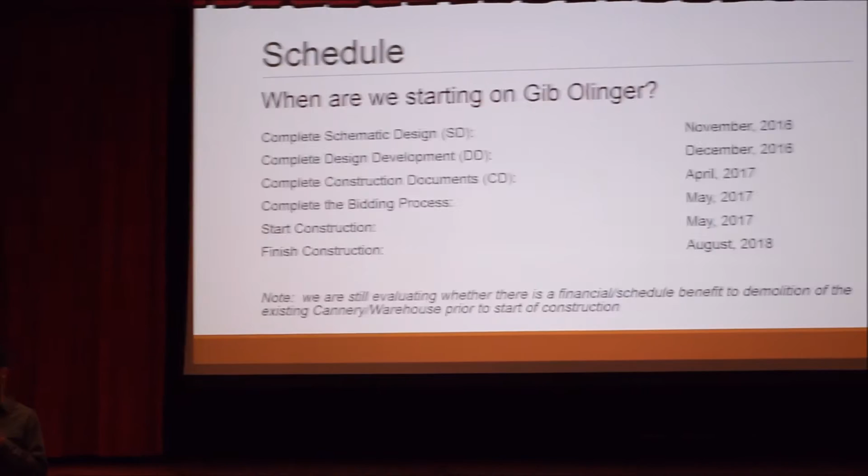So, Gib Olinger, that's really where the design team and the core team, that core team consists of Kevin and his design group, myself, Jason and his Kirby Nagelhout team, and then, of course, on the district administration side, we've got Rob, Amy, Aaron Duff, who's principal at Freewater, David Marshall, our assistant deputy superintendent, and then Tim Truman, principal at Central Middle School. We meet every week, go through that.

We've been really kind of focused on Gib Olinger, growth, the district-wide work, and of course the transportation facility. But tonight I really want to kind of take the time to focus on the Gib Olinger site.

So what we've been doing, Kevin's team kind of completed the schematic design. So what we call the SD is really putting the foundation, the bones of the building together - approximate square footage, really getting the design, the programming elements nailed down. Then as we move into the next phase, the design development, that's where we start sitting down and talking through the specific components of that building.

So we've already had some discussion. We've got a meeting coming up on the 15th where we're going to meet and sit down and walk through some of the concepts on the finishes. With the thought being that we can then go back out to our staff and have those kind of engaging discussions. Once we get done with the design development, the DD phase, Kevin's team loves what we call construction documents, where they get to sit down and start cranking out all those big sheet drawings.

Big sheet drawings that you're all probably familiar with, all the intricate details, the engineering elements. Kevin's team just goes to the grindstone, pushing all those documents out.

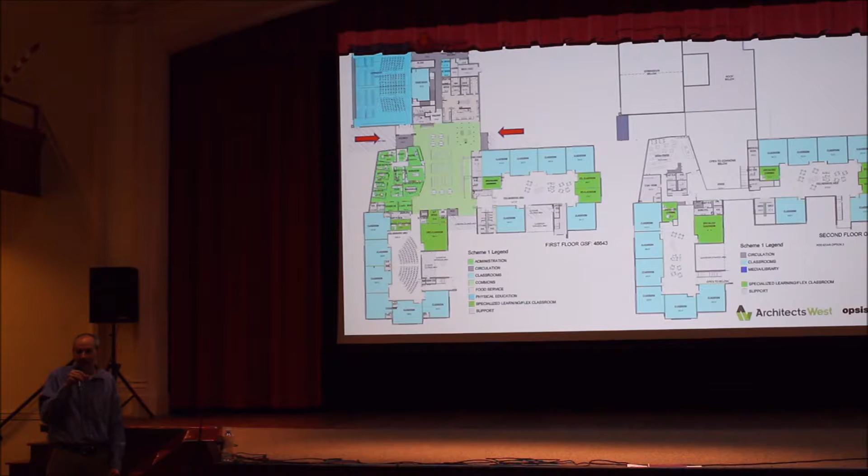So this is the floor plan, the concept plan that Scott mentioned that came out of the schematic design process. I think it's very similar to the last community meeting, that the concept we've been working with continues to hold true and meet the vision that goes all the way back even before the pre-bond planning process and the work that was done leading up to the bond effort.

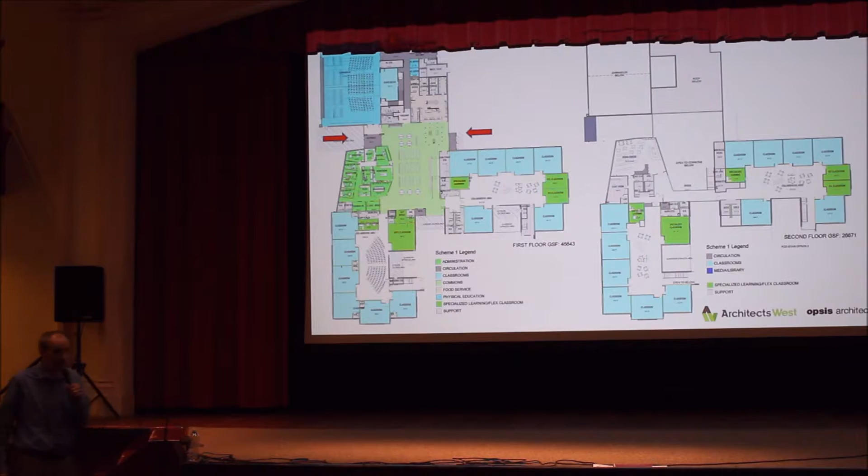Somewhere I have a laser pointer here. So just maybe a quick review, and then I'm going to shout out a couple of those finer details that are some of those fingerprints that have come out of some of the focus group workshops that we had back in October with some of the staff.

So on the left side of the screen, this is the first floor of the building, and on the right side is the second floor. This is kind of a pinwheel design with the center and the heart of the school being the commons and the administration area here on the left. To the north side, the top side of the screen, I think we're losing a little bit of it behind the curtain there, but this is the gymnasium, physical education stage off of the gym.

And then up in this corner is food service. There's actually an event entry on that side of the building, which when we get to looking at the site plan, we'll see there's a parking lot on that side of the building. And then we have these classroom pods, and there are a total of 4 pods. There's a K through 3 school, so there's 1 pod per grade.

Kindergarten being this wing right here, and then there's a pod that stacks on top of that wing, and then another wing here, and then another pod that stacks on top of that one. So again, 4 pods and classrooms around a common space. So it is a big school, large elementary school, designed for around 650 students. One of the nice things about that pod design is that for each grade, it kind of creates a school within a school concept. It's almost like having a smaller school within the context of a larger school.

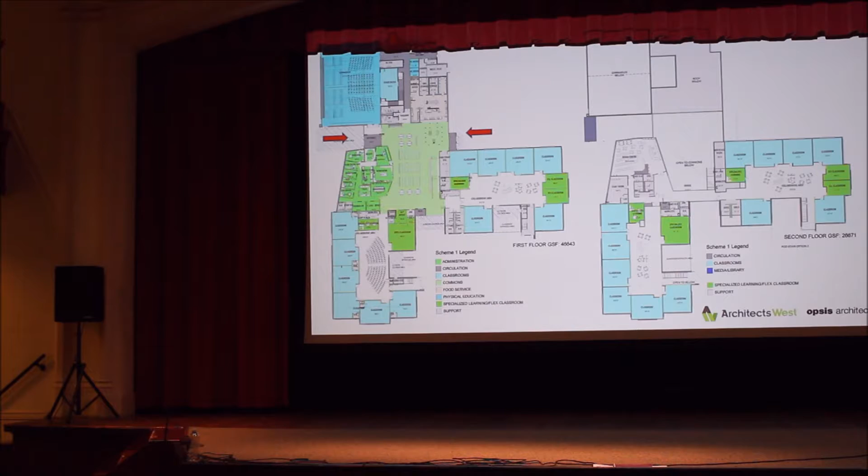I mentioned back in October we had a series of focus group workshops where we invited the staff to come in and chat about and provide input into the classroom design and some of the other areas of the building. So I just wanted to run through a list of things that we've modified in the design.

That were feedback from the staff from those workshops. One is there was some concern about the amount of glass in the building, specifically glass in places down low where it might be a maintenance problem with kids and fingerprints and smudges. The reason we have transparency in the school is to facilitate supervision from classrooms to the collaborative areas in between spaces. That's really a safety and security feature.

So one of the things we're doing is maintaining that transparency, but limiting and being very strategic with how we size those windows. We're bringing the window sills up off the floor, so the windows are primarily in the view range.

Another thing we've done, and I have another image where we'll look at the classroom design, is we've studied a number of different ways to lay out the casework, teaching station, and some of the features you find in the classroom. We went back and forth with some different options, and I believe we've settled on the option that will be carried forward, which we'll look at in just a minute.

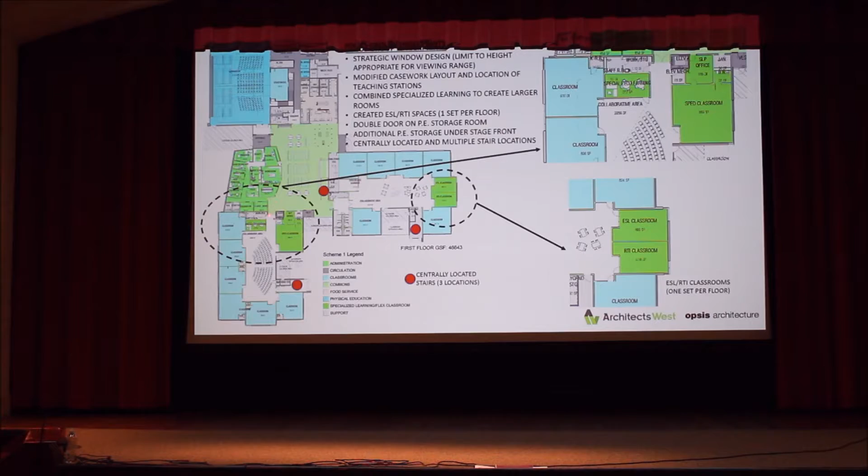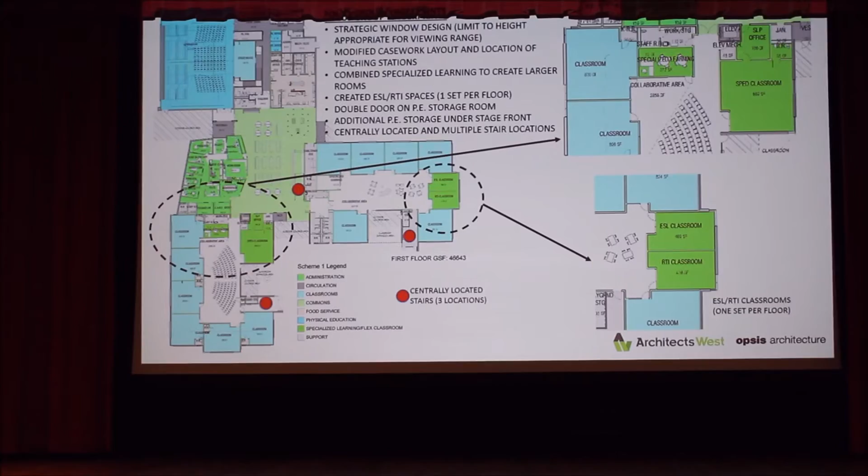Based on the last workshops, there was some concern about the allocation of space for some of the specialized learning. A couple things came out of that: we combined some smaller specialized learning spaces to create larger rooms, and we also carved out an ESL and RTI classroom set on each floor of the building, so now there's one set of those spaces on each floor.

This is a small thing, but the details do matter. There was some feedback about how we would access the PE storage room, for instance. We had a single door access to the PE storage room, and we've changed that to a double door just to make sure there's a wide enough access for getting equipment in and out.

Another thing we looked at is the stage I mentioned, located off of that gym. That stage is elevated by a couple of feet, so there's some space under it, and we're going to use some of that for additional storage. It's just a matter of taking advantage of some of the features of the building for other uses.

Another thing we have to think very seriously about in the design of the building is how kids are going to flow from space to space when they go out to PE, when they go to the commons to have lunch, and all that traffic back and forth. In this building we have three stairways, and we try to strategically locate those so there's efficient and safe movement of children from space to space.

This red dot represents a stair. If there are students in the upstairs portion of that pod, they can go down that stair and they're right out onto the playground, and when recess is over they can come right back in and go upstairs without going through the other teaching spaces and disrupting what may be going on. So there's separation of traffic.

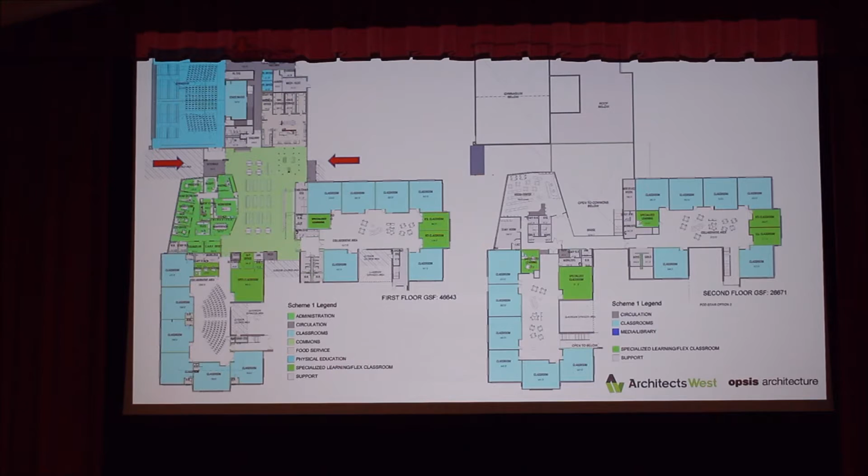Other questions? What kind of flooring, are you carpeting? That's a very good question, but we haven't made that decision yet. One of the things we're working on over the next couple of weeks is our interiors team looking at different options for how we might configure the flooring, so that's something we'll be focusing on and making decisions about soon.

So it could be a hard surface, a soft surface, or a combination. Different spaces will demand different kinds of flooring. For the gym, we're looking at an athletic wood flooring system, that's the one thing that's been decided. The kitchen, of course, would have an appropriate flooring, the commons is probably a hard surface, and the classrooms in those areas we haven't decided yet.

One of the things we'll be looking at as part of our study of flooring is not only what the flooring looks like, but also what it costs, and what the long-term life cycle costs are for those materials. We have a budget we have to meet, so first cost matters, but we also want to think about the long-term implications for the district in caring for that material.

Yes sir, any Mimio boards or projection systems in the classrooms? Yes, there will be some teaching technology in the classroom, though a finalized decision on what that will look like hasn't been made. The baseline is an interactive projector and a voice lift system with distributed speakers throughout the room, so teachers wear a microphone that takes the burden off their voice and allows students to hear better because of the acoustic amplification.

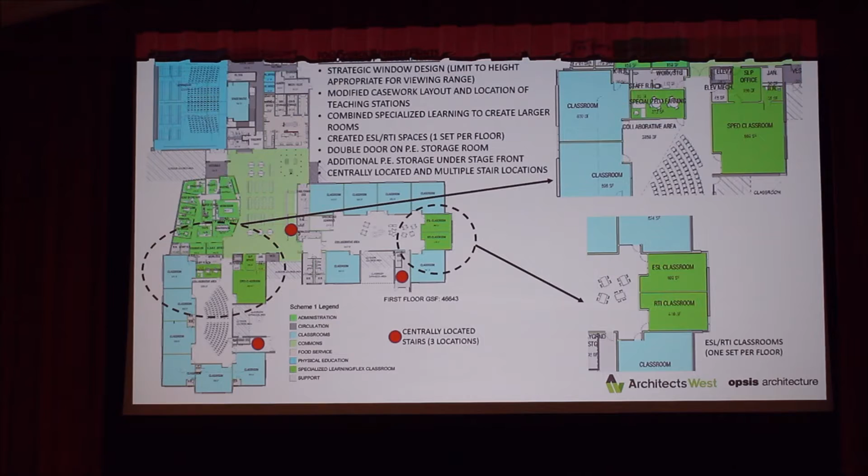Let's go ahead and go to the next slide. This is just an example—I wanted to show you some of the things we're looking at. One of the cool things we're able to do today is more easily translate ideas into three-dimensional models, which are easier to follow and understand.

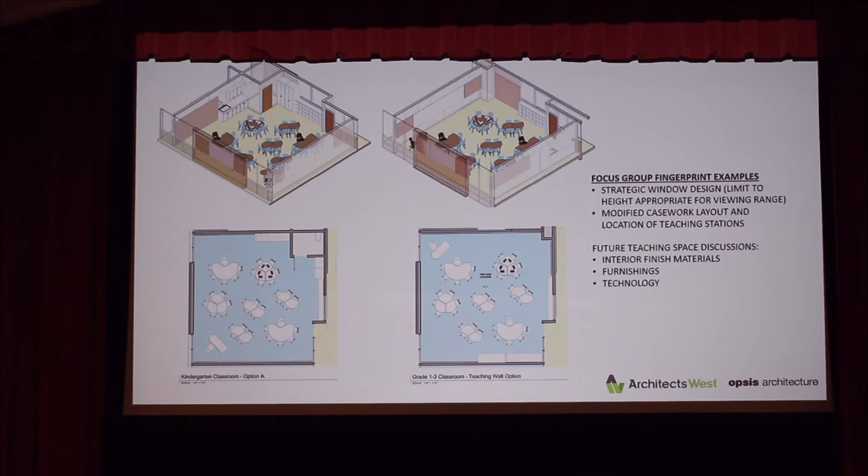You've got a slide of the campus. Oh, I'm sorry, I almost forgot about those. How could I forget about those? There are more slides. How could we forget these?

One of the things we've been doing, and I think we started at the last meeting, is developing some preliminary ideas of what the outside of the building may look like. There are a number of different directions we can go with the architecture, and this is kind of where we've settled. We really want to be respectful of the context we're in. On three sides of this site is a residential community, so we want to be respectful of that context, and we've really moved towards a sloping roof concept.

Not all of the roof will be high slope; some of it will be low slope, like what you'd find on a big box store, which is just the nature of the beast with the size of the building. But around the perimeter there'll be some sloping roofs, which we think is a very good fit for a residential neighborhood.

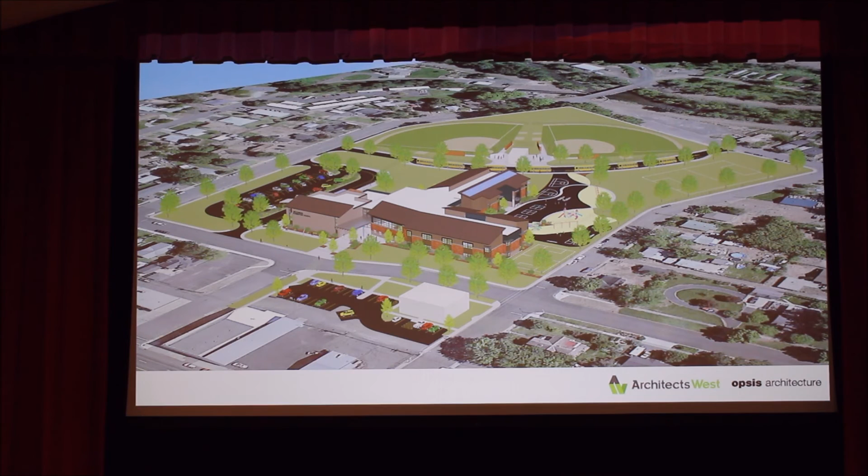Well, one of the things I know Rob's been asking me, we will be putting together some signage. We're going to put some signage up, obviously, at the site itself, and then we're going to be working to put some signage around some of the local businesses, community bank, the city of Milton-Freewater, the library, just so that we can start to really push out the schedule. So stay tuned, and as you start to see some of these designs pop up around town, it is our intent to be proactive and start pushing this out. We'll also intend to keep reaching out to you through the district's Facebook page and website.

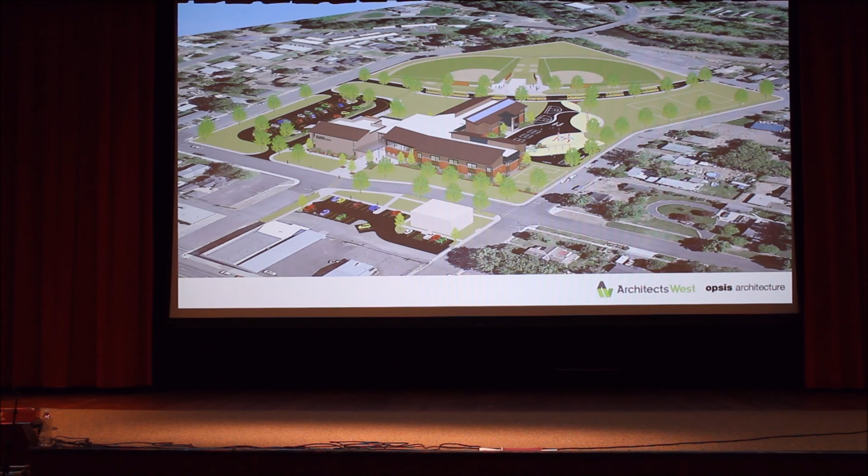Up in there, is there existing dirt parking there? Is that still ours? That is district property, correct. We went down a rabbit hole trying to figure that out, and we pulled back a little bit, focusing elsewhere. That is district property, long-term. We envision that probably being parking or something to that extent, depending upon the need.